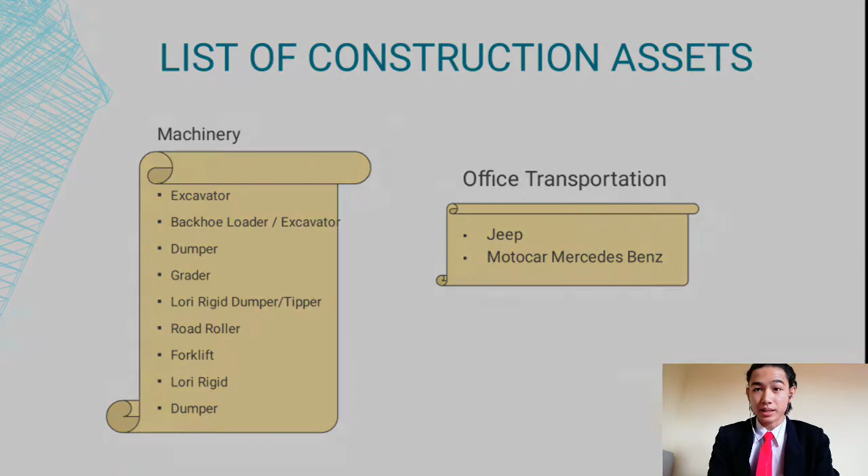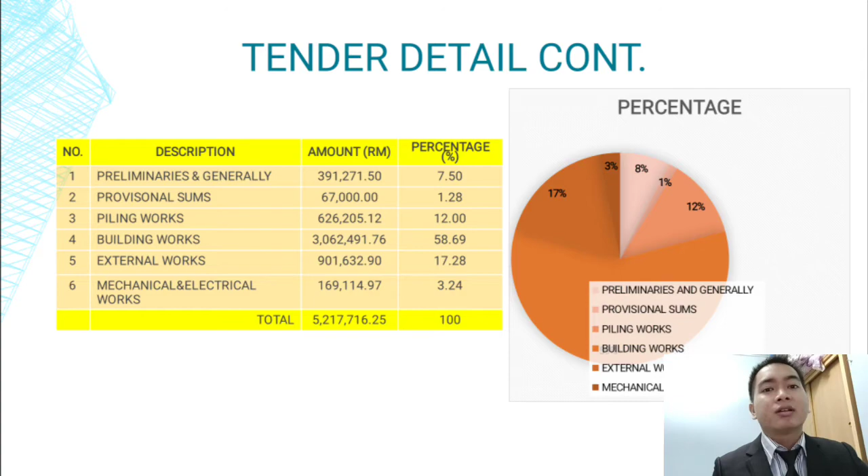That is for the tender detail of this project.

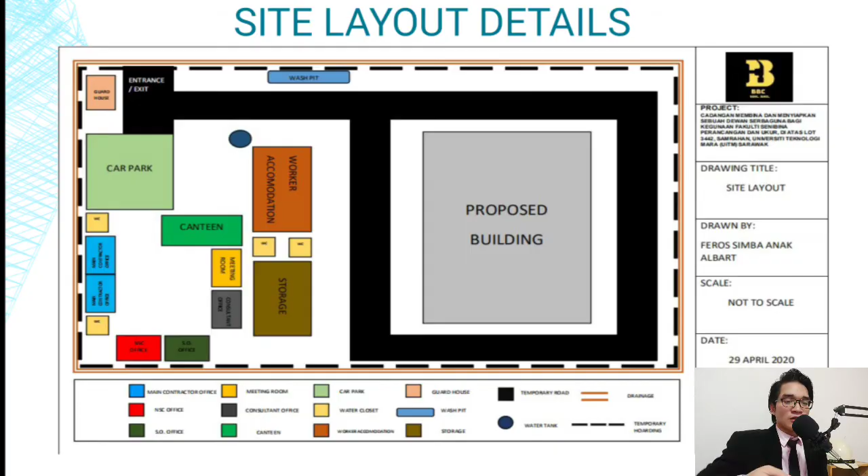Today I'll be presenting, based on our final year project, the site layout. The first one we have is the site layout detail, which is basically where we place the temporary buildings strategically so it won't cause any problems along the way of the construction. For example, the storage area is placed close to the proposed building so workers can obtain tools or materials very easily. Next we have the layout for safety.

For example, we place the first aid kit in certain places which have a very high risk of hazard. For example, at the workers' accommodation, we placed 4 first aid kits in each office at the site, and we also have one at the guard post in case of fire.

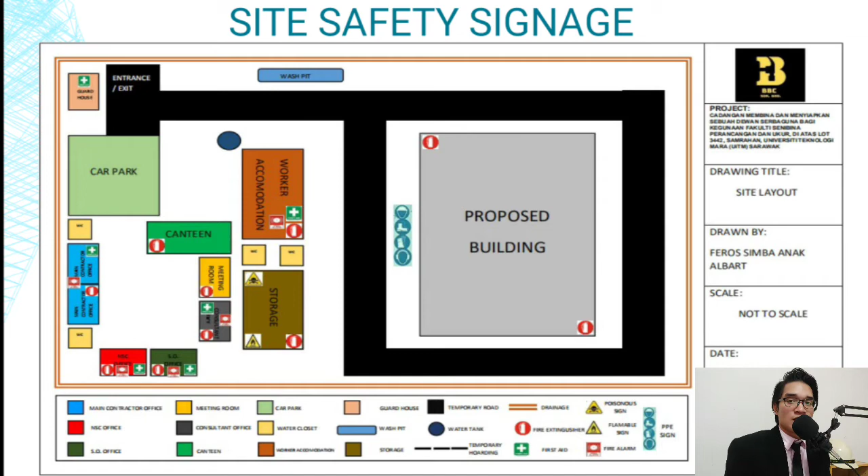So basically the guard post is the assembly point so that if anyone gets injured, they can easily get help from the guards. As for the next one, we have the site layout for the movement flow.

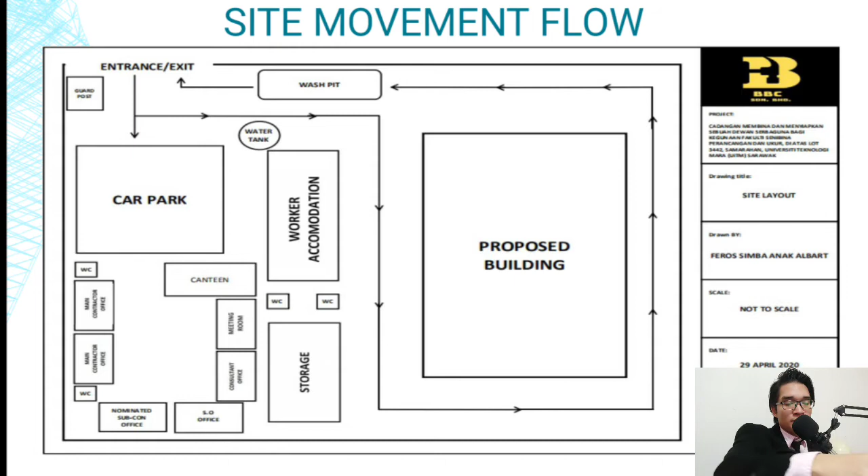For example, for the workers, site clerk, consultants, or visitors, they can directly park from the entrance, straightforward, and park their vehicle at the car park. As for the heavy vehicles, they will go around the proposed building so that it won't cause any traffic during construction. For example, the concrete truck and mobile crane can move in a circular motion without causing any traffic. So that is all from me for the site layout.

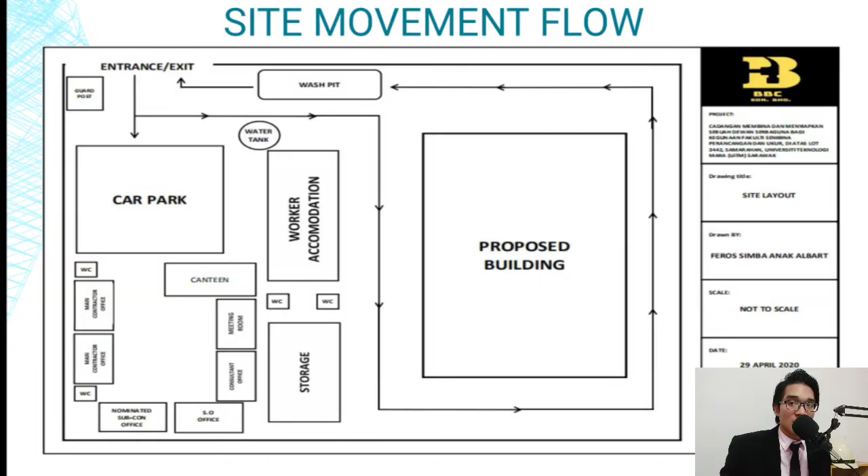Hello, so it's me again. Right now I'll be presenting on the schedule.

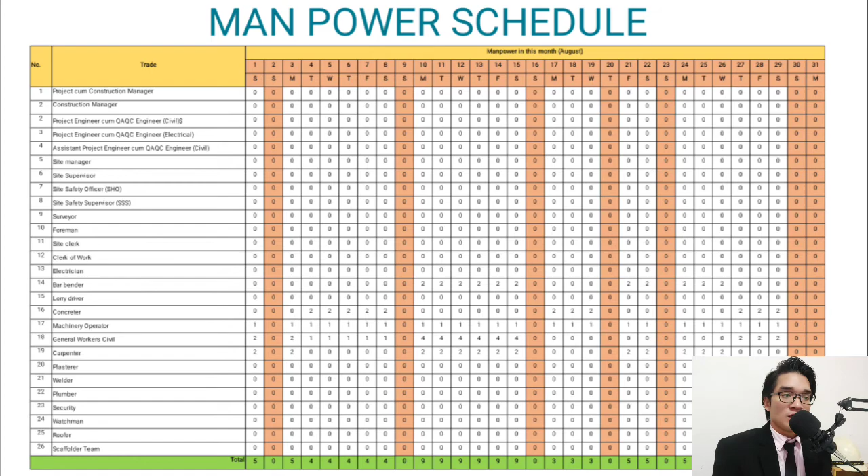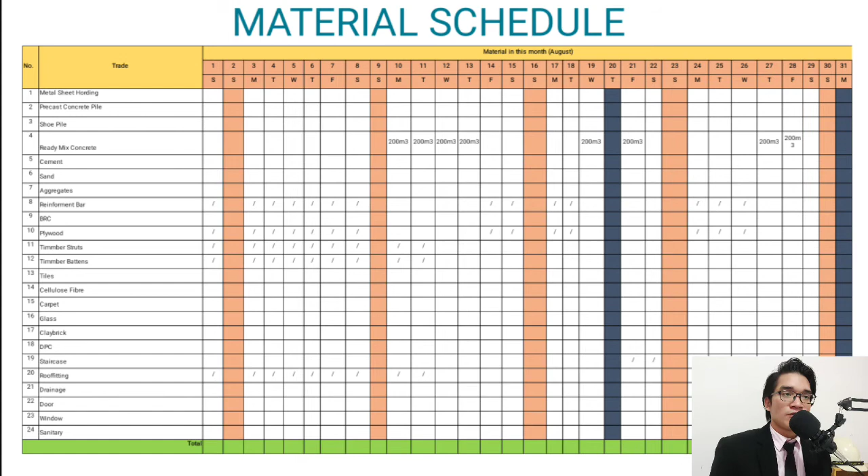So right now, on the next one, we have the material schedule. During the month of August, we are casting staircase and also columns. As you can see, on the 10th of August, which is a Monday, and the following days, we ordered 200 meter cubes of ready mix concrete to proceed with the project. Basically, this is the schedule where we keep track of our material delivery to the site.

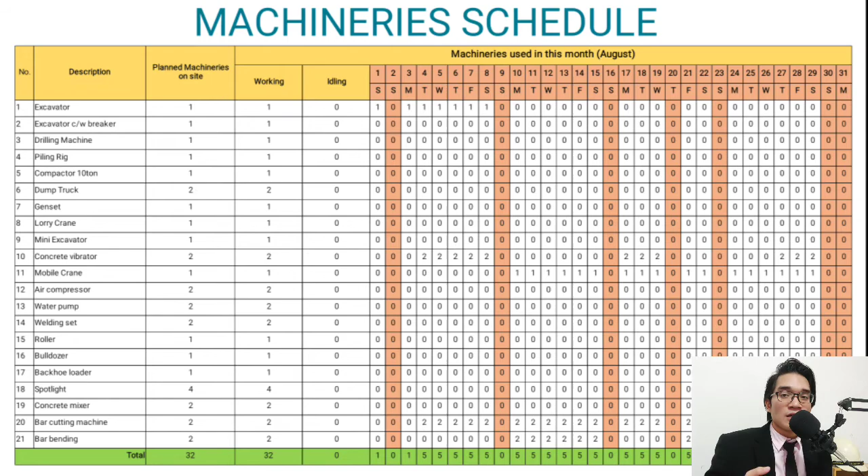The next one we have is the machinery schedule. It is used to keep track of what machines enter and exit the site. For example, here we have the bar bending machine and bar cutting machine, which are used daily inside, so we record them every time they were used. Besides that, we also have the mobile crane used for concrete casting activities, for the casting of stairs. Basically, the machinery schedule is for us to keep track of what machinery is used or enters or exits the site. So that's it for me, from schedule of manpower, material, and machinery. Thank you.

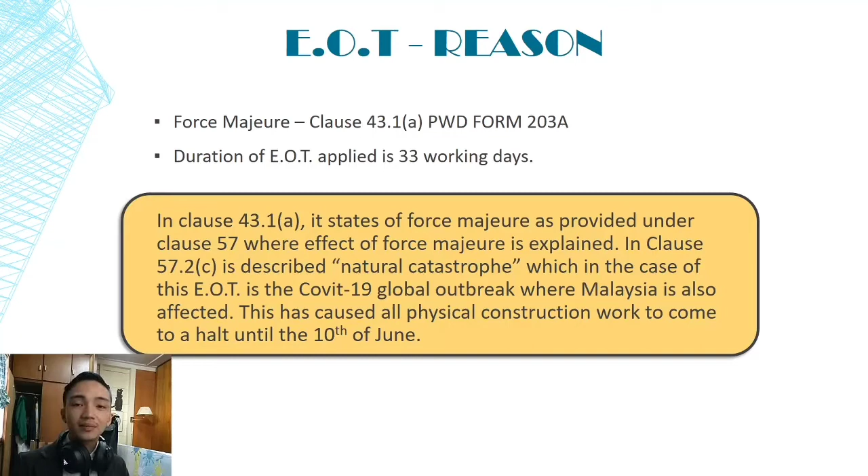Now I will talk on the project planning. I will cover the work program, cash flow, and financial and physical S-curves of the project for task 4A and 4B. So the first one is 4A, which is for the EOT application.

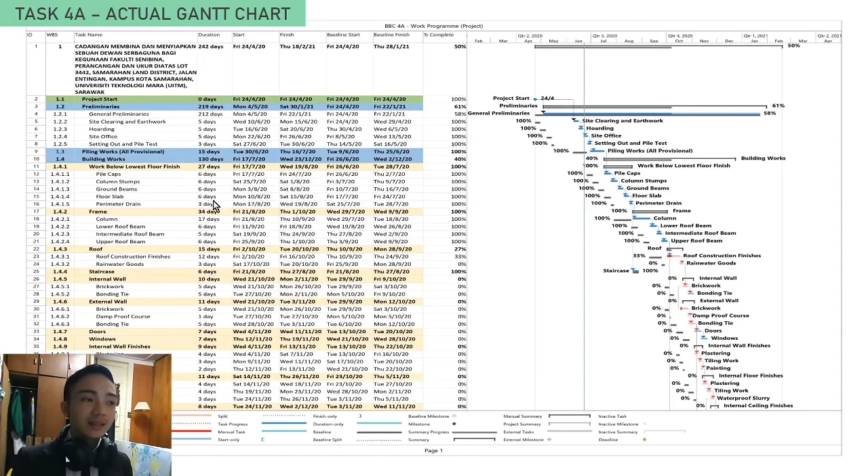For example, roofing, the lower roof beams, intermediate beams, and upper roof beams have to be completed first in order for the roof to start construction. This happens for a few other tasks as well, and you can see it all links until the project finish at the bottom here.

The original project finish date was on the 28th of January 2021, and after the EOT, it became the 18th of February 2021.

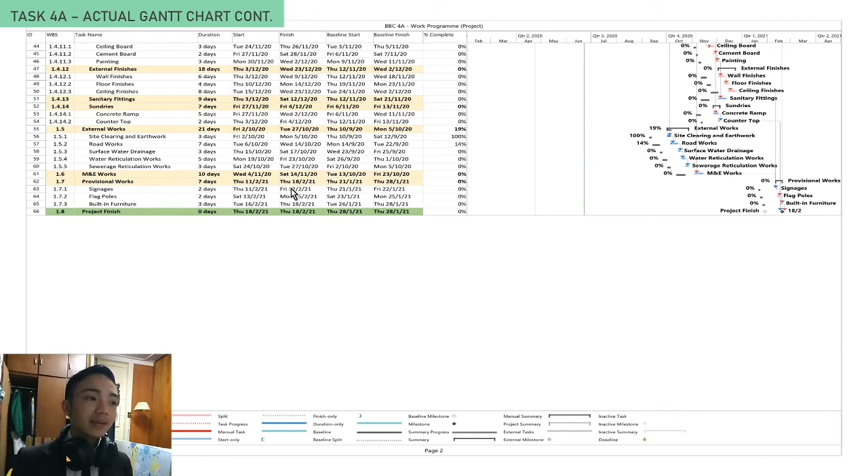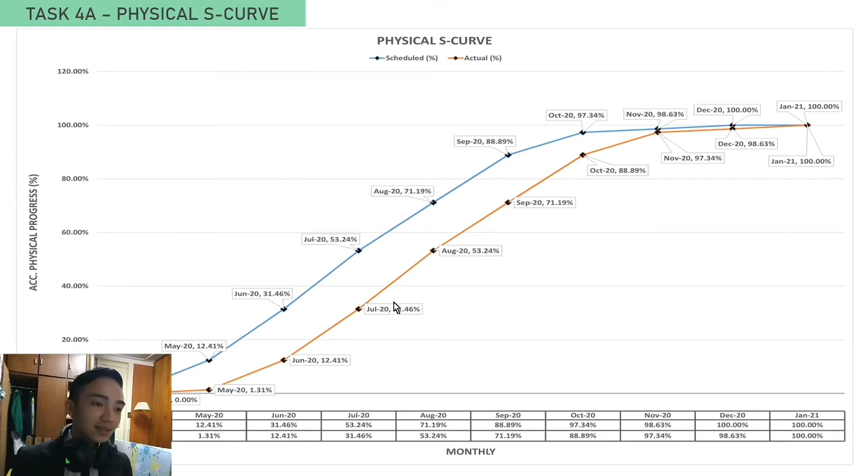Next we have the physical S-curve for task 4A, more or less the same as that one. We have the scheduled and actual here again, but this one is in percentage of physical works. So the actual has a slow start and will eventually catch up with the schedule.

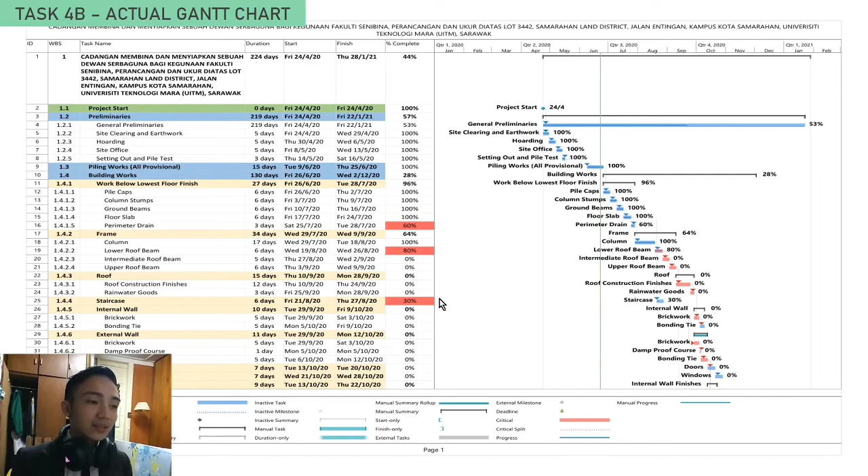Due to the roof beams not being completed, the next task cannot be carried out, which is the roof. But the staircase can be carried out, in early stages, with a delay as well.

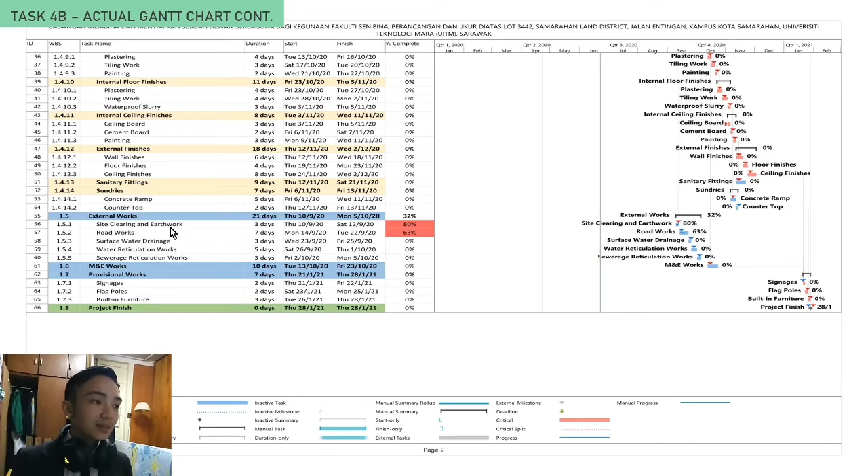And then for the external work such as site clearing, earthwork, and road works, this can also be carried out, but with a slight delay as well.

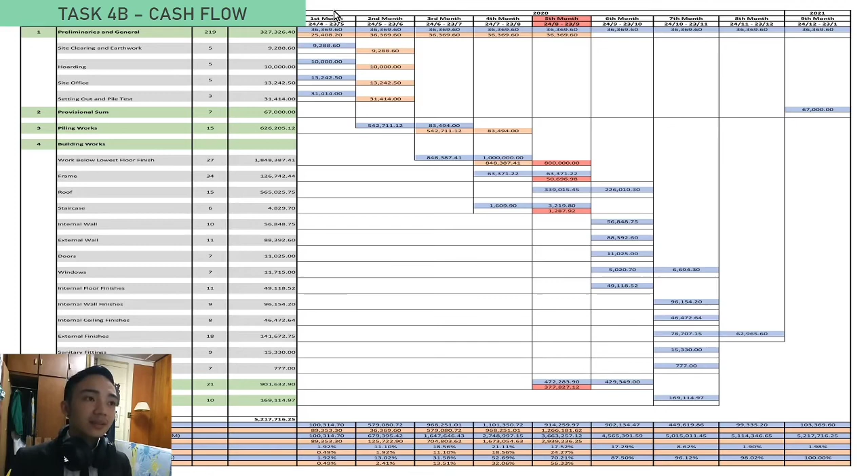Now we shall move to task 4B's cash flow. This is more or less the same as task 4A's cash flow, except that we did not add the EOT month. So as you can see here, we continued with the original completion date of 9 months, and for the 5th month, which is the middle of the project, half of the project, this is when we have the delay. So the delay is 20% of each of the project's tasks. Here, in red, are the ones with a delay of 20%. The data at the bottom follows the same format as task 4A's cash flow.

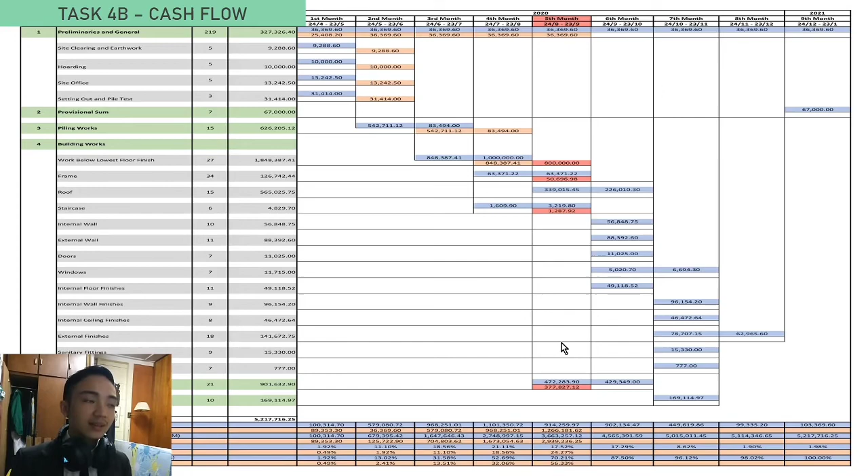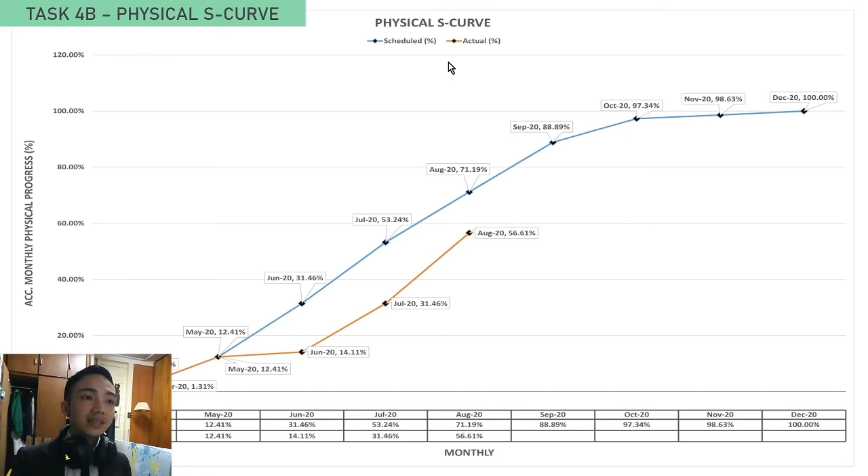Next, we have the physical S-curve. Now, if you notice here, due to the MCO, projects for the first month cannot start yet, so there will be no physical progress. So only the physical progress will be at the later stage, after the 10th of June. As you can see here, it will slowly rise up.

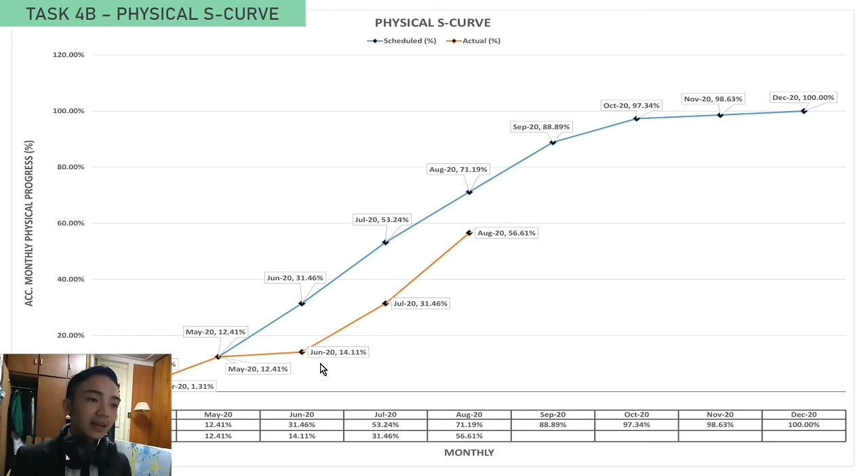My name is Albert and I'm safety director of our BBC company. Today I'm going to present briefly about safety and health of our company. So let's go to the first slide.

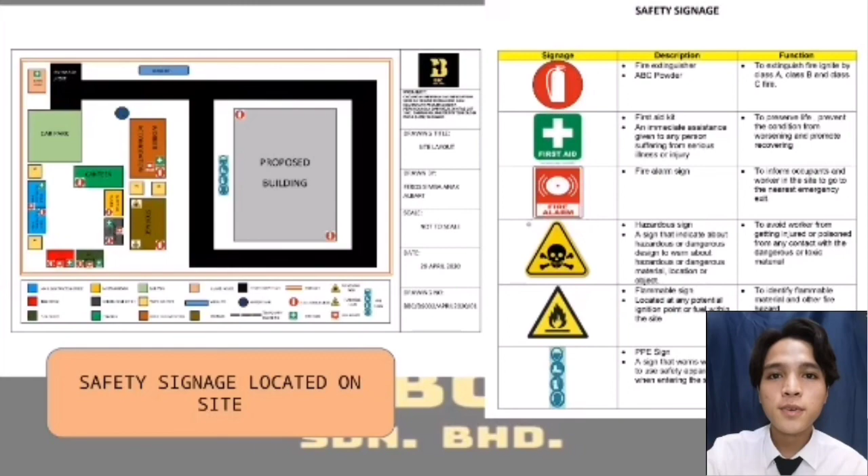I will be presenting the progress photographs. The project title is Cadangan Membina dan Menyiapkan Sebuah Dewan Serbaguna bagi kegunaan Fakulti Seni Bina Perancangan dan Ukur atas lot 3442, Samarahan Land District, Jalan Entingan, Kampus Kota Samarahan, Universiti Teknologi Mara, UiTM Sarawak.